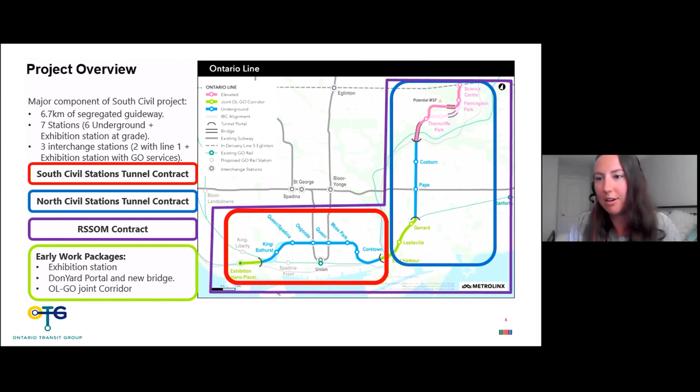So getting started with the workflow, the first step would be to set up a project in BIM 360, and this is fairly easy. The initial setup would be completed by the account manager. From there, the account manager can assign project administrators, and these individuals would manage the specific project on BIM 360 and would send out invitations to all of the project staff to join the project site.

BIM 360 offers a wide range of services, but for this project, we only required BIM 360 Docs. In our case, users had two options from the project homepage: to navigate to document management or to model coordination. We'll start with document management.

This is the tab where all the project files are stored. That includes contracts, background information, CAD models and references, Revit files, PDFs, and Excel spreadsheets. BIM 360 allows you to edit Excel and Word documents on the website through a web version of Excel and Word. You can upload project files by either using the upload button or simply dragging files into the web page window.

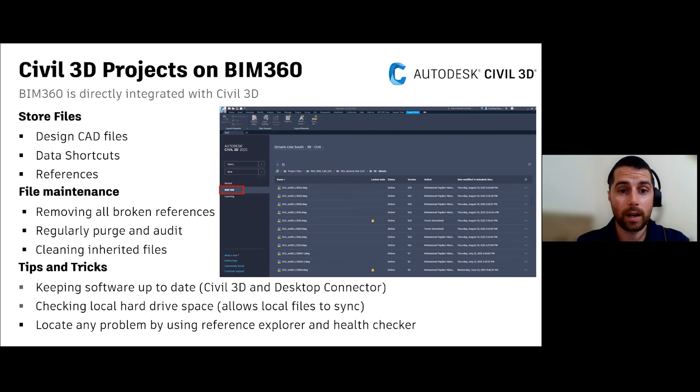Thanks, Courtney. So this project was the first major project we had hosted all Civil 3D files and Revit files on the BIM 360 platform. As you can see from the screenshot on the right, Civil 3D 2021.2 accesses BIM 360 directly from the new home screen, bringing the user experience forward to match what Revit users are used to experiencing.

As we migrated to BIM 360, we were able to store our project design information on the cloud: our discipline design files, data shortcuts which included surfaces, track alignments, pipe networks and pressure pipe networks, and reference files were also hosted to allow our design teams to incorporate design information received from the client and owners into their design files accurately.

File maintenance was one of the most important aspects of managing our project, and this was identified early. Working with Autodesk, we mitigated errors on a weekly basis and increased our knowledge as a team as to some of the common reasons that may be causing errors and sluggishness in our files.

It was vital to our success that broken references were removed from our files being hosted on the cloud. We had experienced some file mismanagement where files linked from ProjectWise or local servers had not updated the relative paths. This was a major issue for Desktop Connector, but utilizing the Reference Explorer and expanding the team's knowledge, we were able to easily identify and fix problematic files.

Regular cleaning of the files was another important tool we used to increase our file efficiency on the cloud. Purging reg apps was a major tool we used in our success story. Also, regular purging and auditing of files ensured no files were slipping in terms of cleanliness.

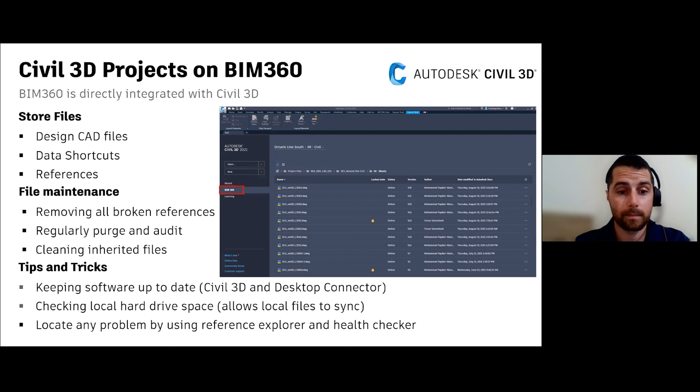So next is drawing creation. We found that it's very important to set up standards for drawing creation at the beginning of your project and to make sure that all designers are following these standards. That includes naming convention. Since BIM 360 is version controlled, it's important to keep the drawing names the same throughout the project.

CAD model files should be created from a DWT template file. This template can be set up to include shared coordinate systems for the project, standard fonts and styles, as well as standard settings.

In terms of sheet files, it's important to set up a standardized title block for the entire project. If this is done, then you can use the OCR reader in BIM 360 to automatically fill in the PDFs. This means when a PDF drawing is uploaded to the plans folder, the reader will automatically populate the drawing attributes, such as the drawing name, the description, or revision number.

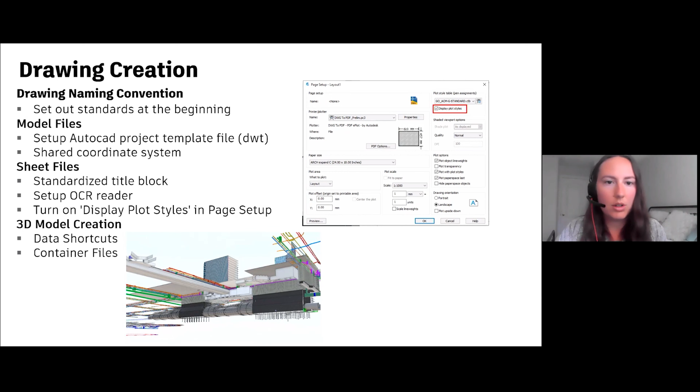For these types of large transportation projects, we work closely with our Revit counterparts. In our case, we had architectural, structural, mechanical, electrical, and ventilation designing in Revit. With a project team this big, it's important that we coordinate our models well, and we achieve this by setting up a shared coordinate system for all the disciplines.

This was an easy process once the Civil team and Revit teams had coordinated and set up saved views in Revit. The Revit teams were asked to keep the name of the exports consistent during the duration of the project. These saved views would then be exported to DWG and shared with our Civil teams to a specific folder on BIM 360. In our case, these Revit exports were being used by our track, road, landscape, utility, and drainage teams.

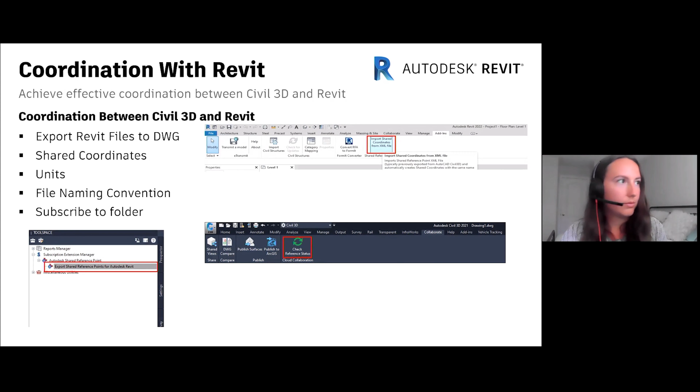We utilize the functionality of the cloud and the tools in BIM 360 to conduct reviews in an online environment. PDFs that were posted to the plan section of BIM 360 were used in meetings to discuss project design issues, and markups were created on the PDF drawings.

Internal quality reviews were conducted across a variety of sub-consultants, and permissions were managed by the BIM management team to ensure the project security was being managed correctly.

Another useful part of hosting our Civil 3D files on BIM 360 is designers could make changes to their drawings and send a link to discipline leads to view and mark up the drawings in the DWG itself, which removed the need for endless printing of sheets. This functionality also meant someone without AutoCAD on their computer could open and view the files, therefore reducing overhead costs to the project.

The issues function was something we had delved into and utilized a lot on this project. In the beginning, we used it as a collaboration tool for requesting information between the design team. The issue would be open. When a response or a document was provided, the status would change from open to answered. And when the originator was happy with the response, the issue would be closed.

Email notifications from issues was a really useful tool, and allowing users to manage whether they received notifications instantly, hourly, or daily proved to be wise to not flood certain team members with emails.

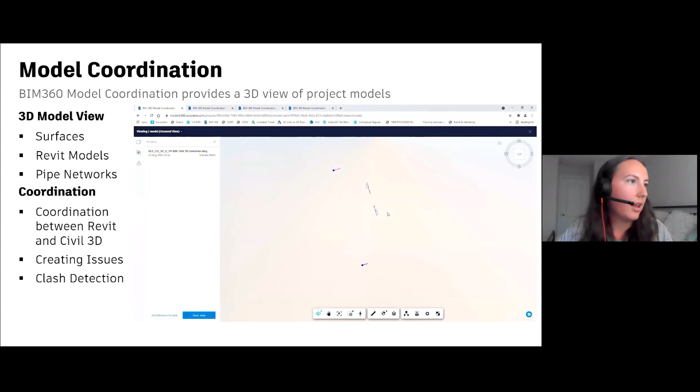So in BIM 360, under model coordination, you can see a list of all the models that have been published. You have a couple options, and the first one is just to view an individual model. In this case, I've selected a 3D pipe network, and you have a series of tools at the bottom of your screen. One of these tools is properties. So if you select an object on screen and hit properties, you can see a full list of information about the object. In this case, it's a 100mm PVC water main.

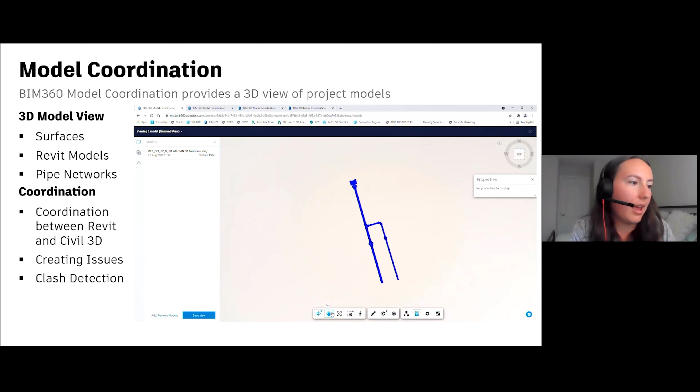Your other option is to use the measure tool. So I can see it's a 3.2 meter pipe. And then you have a few other options, which are pan and orbit, and it just gives you a different view of the 3D model.

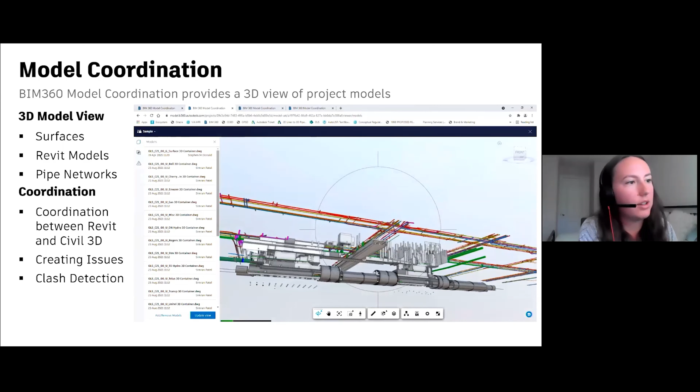And then if you exit out of this, your other option is to view multiple models at once by either selecting from the list or going to the saved views at the side. In the saved views, you can save a bunch of models that you want to view together. So I've opened the saved view, and you can see the surface, you can see the station from ground level to tunnel level, and you can see a series of pipe networks.

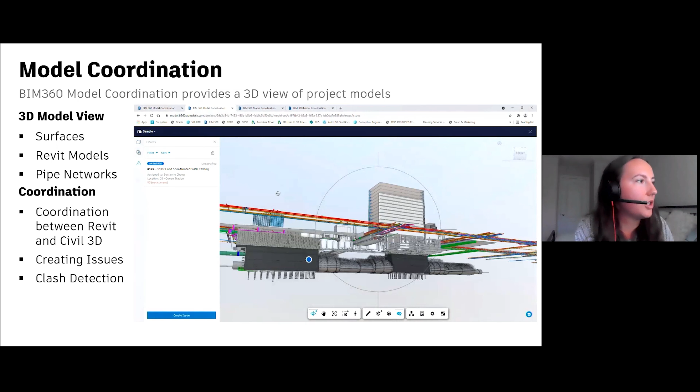And in here you have the similar tools at the bottom, but you also have options at the side, and one of those is to create an issue, and you just hit create issues at the bottom. So in this case, if I wanted to point out a conflict in the design that I want the designers to be aware of, I would create the issue, tag the designer, and they would receive a notification that something needs to be fixed.

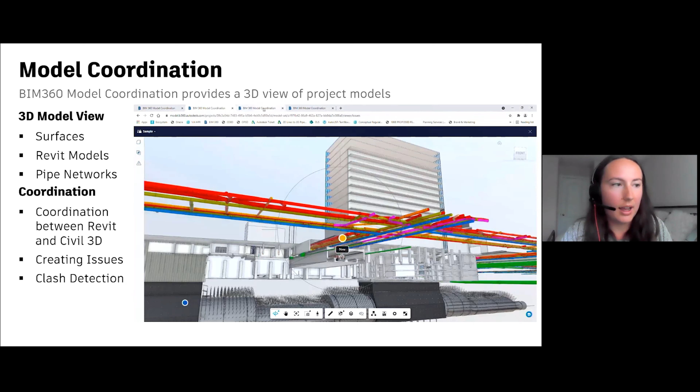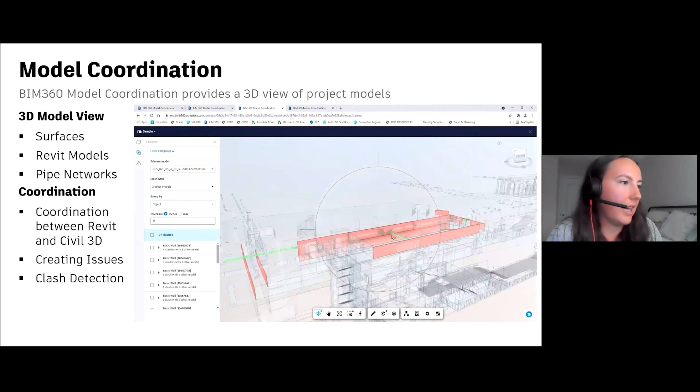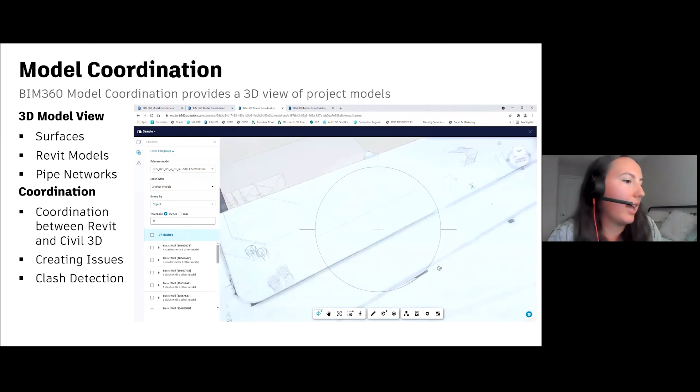Your other option at the side is to view clashes in your model. So if I were to hit that, this is what comes up, and you have the option to choose a model that you want to check clashes with other models. In this case, I've just chosen the architectural and the utility models. Then you see highlighted in red and green, these are all the conflicts in the design currently. So I can see that there's an existing pipe that's in conflict with our station and will need to be relocated. Same thing, you have tools at the bottom to measure, check properties, orbit, and pan.

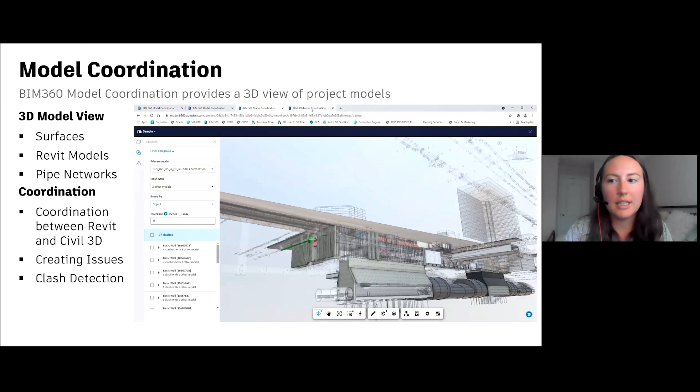And then your other option in model coordination is to view a list of clashes in a table format, which you can see on the screen, and it will show you the number of clashes between different models. And if I were to select one of them, it automatically shows a 3D view of where this clash is located. And this is a great tool that we used throughout the project to coordinate between all the disciplines.

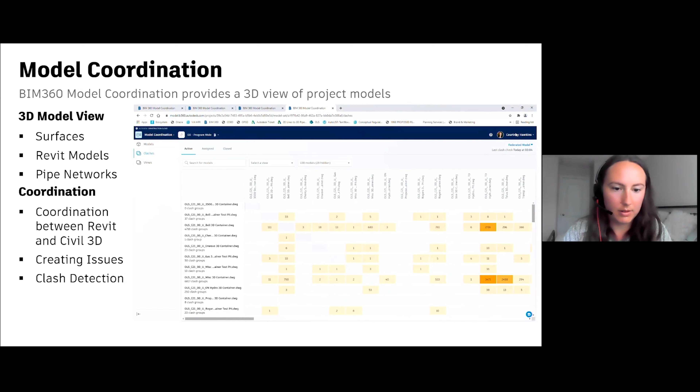And over to you, Sean.

Thank you, Courtney. So one of the important things that we learned early about this particular effort or this particular workflow was making sure that we were setting ourselves up for success in the very beginning. It's critically important that we have the correct versions of software on our machines and that we're all using the same versions of software, specifically of Desktop Connector.

The other thing that we realized is that preparing the data was also critical for our success, making sure that we checked the drawings for errors, removed any unused information or data that was attached to the drawings, including redundant information. And then, like Stephen alluded to earlier, we leveraged the Autodesk batch save utility to run a clean Lisp routine on that to make sure that the drawings we were uploading were cleaned. We also used that utility when we received any new files from subconsultants that were not put up into BIM 360 by that particular team.

We would clean these files and ensure that they also were loaded into BIM 360 in the best format that we could get them in.

We also looked at options for migrating data. Early in this particular project, we used the manual migration method, but during the project, Autodesk released a tool for migrating projects to Civil 3D, and I'll give you a little preview of that tool here in just a moment.

The last thing we wanted to make sure we documented well were the troubleshooting processes. Autodesk released with the 14.10 version of Desktop Connector a tool called Reference Explorer. We'll do a quick demo of that in just a few moments. Reference Explorer gives us the opportunity to unwind any of the dependencies which may not be in the area they should be for BIM 360 to function at its optimal performance.

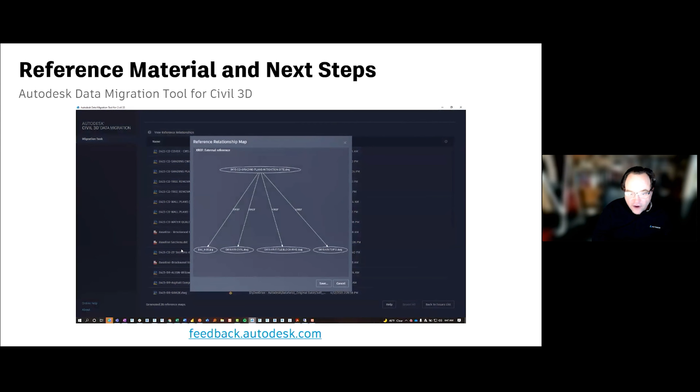We even get a nice little image here showing what files are attached to the drawing that's indicated to have a possible circular reference. So here you'll see that this particular cover drawing has an X-reference attached to it, and the grading drawing has a number of references attached to it.

The Reference Explorer tool does a very similar task for us. So the next step now is to go back through the integrity of the files, making sure that everything is ready, and then we start uploading.

This kicks off Desktop Connector, which will be moving massive amounts of data up to the cloud from your machine. So what it's literally doing is copying it from the location where the data is stored, either locally or on a server, moves it over to the Autodesk Docs location, and then pushes that up to the cloud for you.

You also get the opportunity to view a CSV file, which gives you all the information about the files that it pushed to the cloud, as well as data on any references that may be broken.

Now that we've moved our data to the cloud, we may run into scenarios where we need to check that information. On the next slide is our Reference Explorer tool. One thing I forgot to mention: the data migration tool is available at feedback.autodesk.com and will likely be in the App Store very soon.

So what you're going to see here on this particular video is we're going to use the Reference Explorer tool to actually unwind some of the dependencies that are in our Autodesk Docs directory.

So we'll navigate in File Explorer to our project, and we'll find the files that are in question. We'll want to make sure that we right-click on those files and synchronize them so we have the latest and greatest. If they're online, it will not dive into the file. They do need to be synchronized.

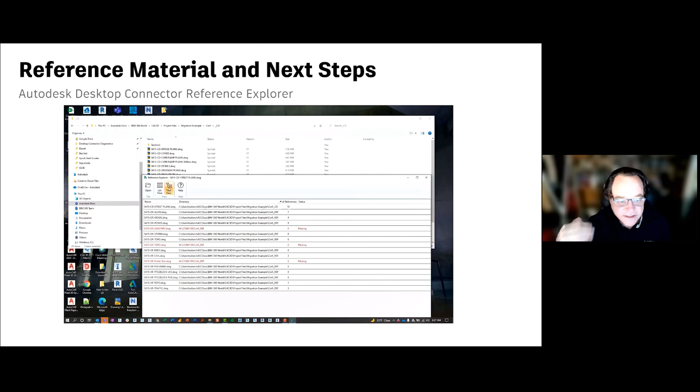It starts out with a list view here for us, but if we go up to the tree view, we could start digging even deeper into the files that are missing those particular references. So the street plan may not be missing any references per se, but one of the dependencies in the street plan is missing a reference.

And that's what we're doing here—we're going to minimize this list and find out exactly where those drawings are looking for a W drive, when they should be looking for our Autodesk Docs location.

And so with the Reference Explorer tool, you now have the ability to unwind your own, say, network room, so to speak. It's kind of a mess of wires that we've now unwound, and we've got everything working in the correct way. This ensures optimal performance within BIM 360.

On the next slide, what we're going to see is that we've got a list of best practices and some reference material for you when you're pushing your project up to the cloud or starting your project in the cloud. So there's a couple of documents around collaboration for civil. We also cover best practices for migrating.

Again, there is a manual method, but I would highly recommend you use the migration tool. And then always remember that Autodesk support is here for you. So if you do run into any deltas, please don't hesitate to reach out to the support team at Autodesk, and we'd be more than happy to get you some answers.

But I think the lessons that we learned as a team here was that clean drawings are friendly drawings. Clean drawings are friendly drawings, whether they're in the cloud or on a server. It doesn't matter what cloud environment they're in—they will be happier if they're clean.